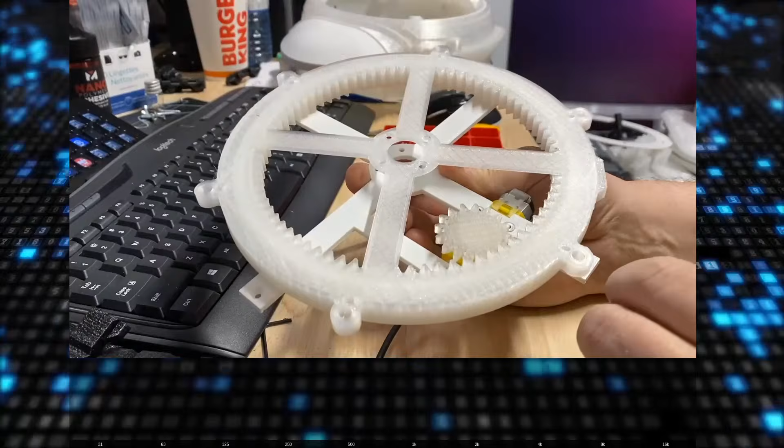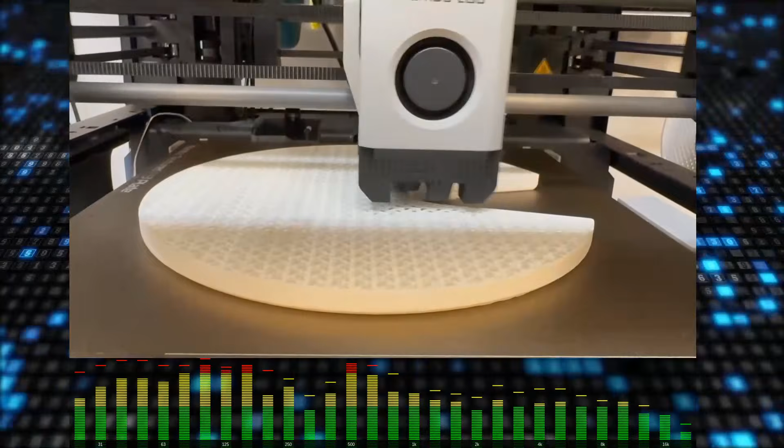Flip the switch, light the fire, ideas spinning higher, higher. Testing, melting, shapes take form. Welcome to the stream. Do it 3D and laser dream. Cut it, carve it, build the same. Welcome to the

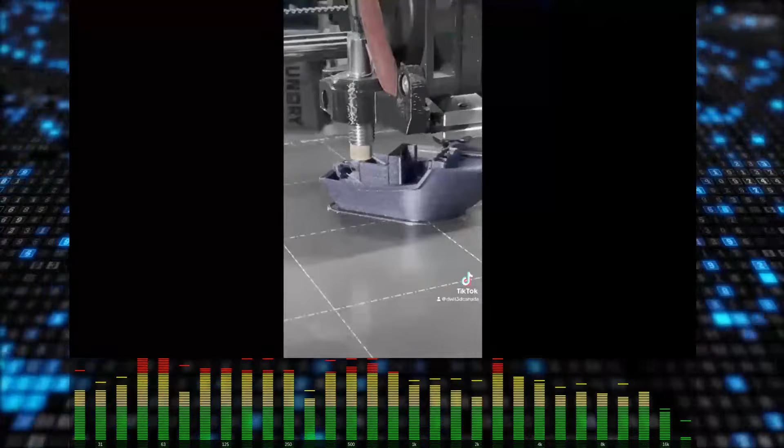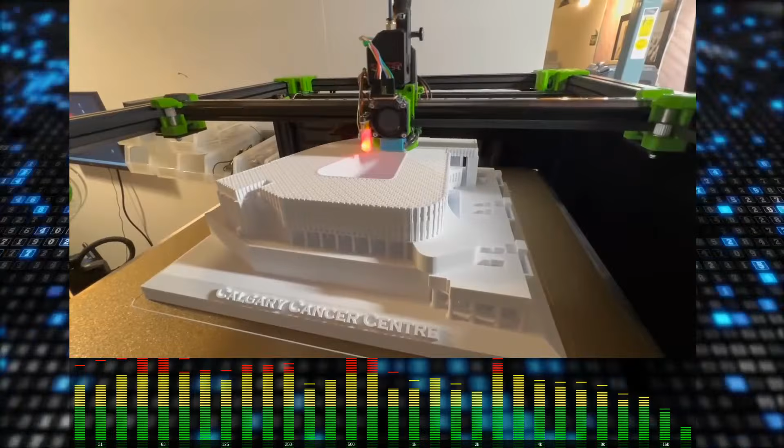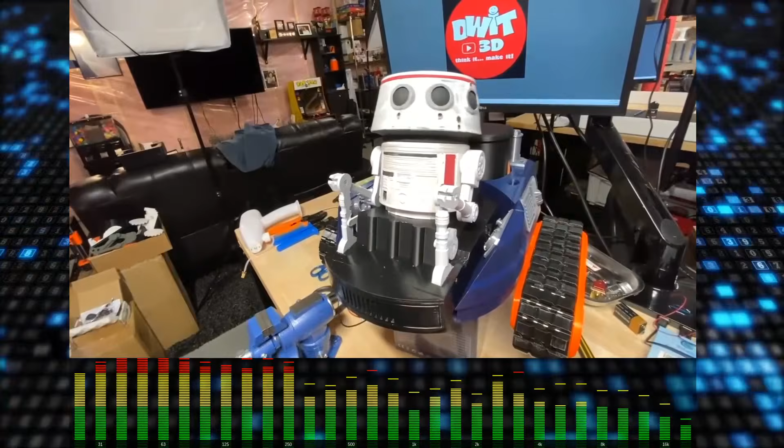Stream. Lines of code, sparks that fly, layers stacking, reaching sky. Mistakes happen, we don't cry. We learn, we teach, we play. Together every day. Welcome to the stream. Do it 3D and laser dream. Cut it, carve it, build the same. Welcome to the stream. What will we make today? What will the laser say? Engraving shadows bright, crafting through the night. Welcome to the stream. Do it 3D and laser dream. Cut it, carve it, build the same. Welcome to the

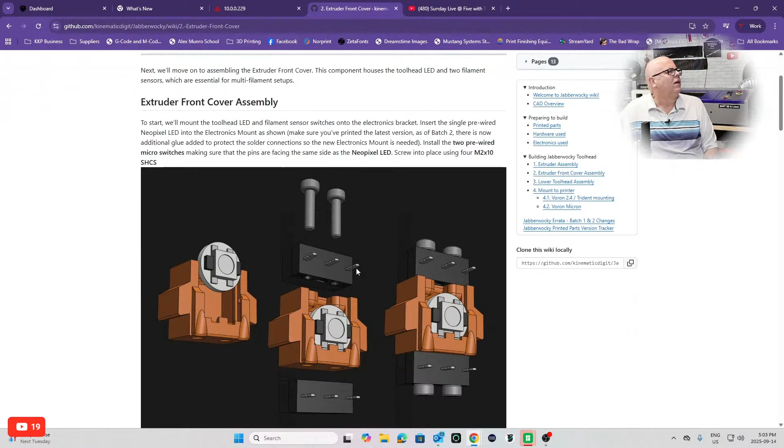So last time we were at this stage right here where we finished putting together the extruder front cover assembly. Okay, we got the LED in, we got the little switches, the sensor switches, I'm not even sure what those are going to control yet, but we're going to find out. And then next thing, we didn't have this, which is the clear insert. And then the next thing we're going to start working on is this shaft.

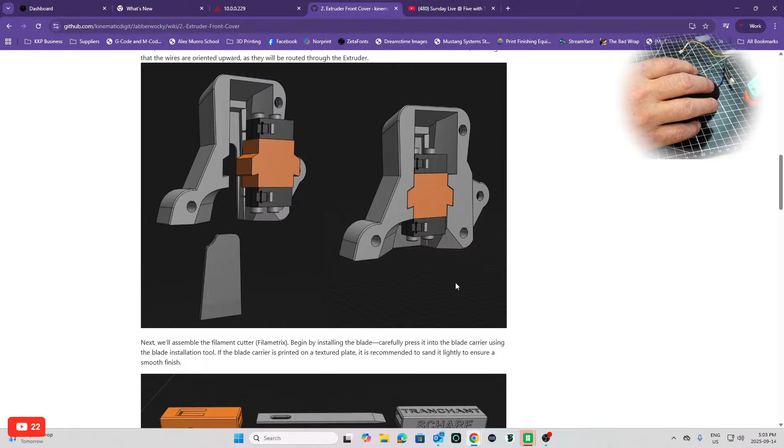That must be a foreign language for sharp. Sharf. Tranchant, I'm not even going to try and say that. But there is where we're at, right at that spot right there. Why did I do what I just did? I don't know why I did what I just did.

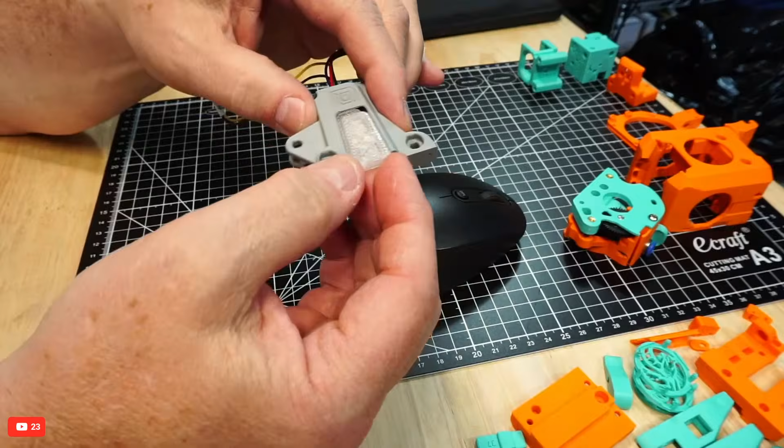So the piece I just printed, which we didn't have printed last week - we just finished assembling this piece here. We had the wires all coming out, had to put the LED inside here, and then there's this clear piece. There were 2 options to print on the clear piece: a logo and one called Monster. Because I'm afraid of monsters, I'm going with the one that says logo. This is transparent PCTG. I printed that, and it'll just slide right into that piece like that, and that's going to illuminate the LED that is under there.

That's a fancy LED - my brain escapes me right now on the actual name of that, but anyways that part goes in there like so. So we'll continue on now, and we need the ingredients for the blade holder.

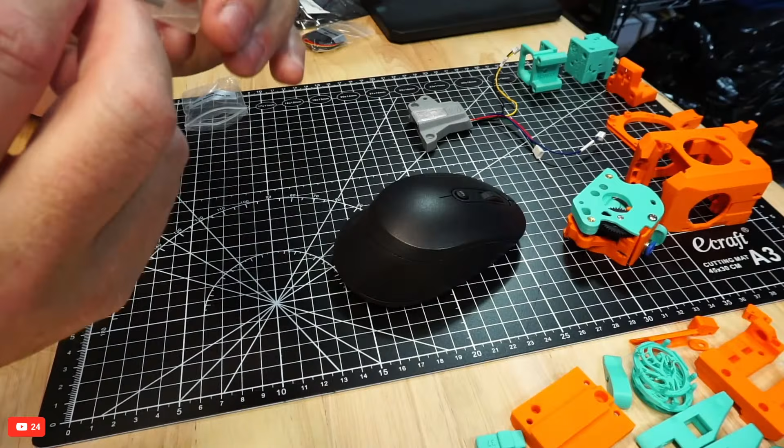That is our blade, which is going to be used to cut our filament, because this does have a cutter. Oh, this comes with a few blades actually - look at that, it looks like we got 4 or 5 blades in here, at least 3 to 4 to 5. 5 pieces, it says right there on the bag. So I was pretty close in guessing that, wasn't I?

We have our little blade holder thingamadoobers here. This is going to be part of the cutting system. Now, for some reason, I printed 2 of these. I think again there's 2 options to print, but these both have the V60 number on them. Sometimes I just print 2 because I like to have a spare.

I think this is all we're going to need. So let's go ahead and check the video.

You've got a frickin' cold, yeah. These are allergies. Hey, pup away. You were here but gone, but not to worry, you won't be for long. That almost rhymes, pop away. You should write a book. Oh, forgive the sniffing, it's just bad allergies today.

Okay, let's switch over to the display. So our next step, what they're saying, will assemble the filament cutter, Filametrix. Begin at the end by installing the blade - carefully press into the blade carrier using the blade installation tool. If the blade carrier is printed on a textured plate, It is recommended to sand it lightly to ensure a smooth finish.

So let's see, the blade carrier is this guy here. It was printed on a textured plate, but it has a very smooth finish - it wasn't very deep. Let me actually go ahead and put you back here. It was printed on a textured plate, but it's not a very rough finish at all - it's actually quite smooth, so we're not going to worry about that.

So let's pop a blade out of here.

Hey, Soldier Farms, how are you doing today?

Okay, we'll pop a blade out. There's 5 of them, we just need 1. There we go, we have 4 spares because, you know, we all know 5 minus 1 is 3... 4.

Here is the blade carrier, which is supposed to help prevent slicing my finger open, but if you know me... So I think the front of the blade goes in like so, with the blade portion up. It has a very tiny taper, so we want the taper up in here. Come on, get in there again - I just had you in there. There we go. And then the blade holder, we're holding in the down position like this, and we are sliding the blade in.

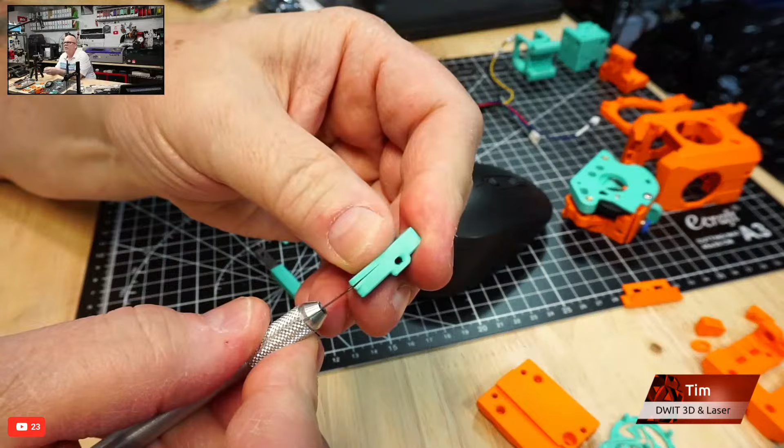I don't want to deform this piece. If I have to print another one, not a big deal. Yeah, see it's starting to split here. Let's see if this will go in. If I got to print another one, so be it. But let's just see if I can get this. Nah, see, we're gonna split that holder there. So we may end up just printing another. I may just, yeah, see that broke off.

So let's just go ahead and print another piece. Yeah, see, it's the overhang in there. I don't know if you can see that, but there's some overhang filament in there that was not quite overhanging properly, and we're going to have to reprint that piece. Not a big deal. Of course, that's the one piece I didn't print a spare of. I have 2 of everything, but not 2 of that.

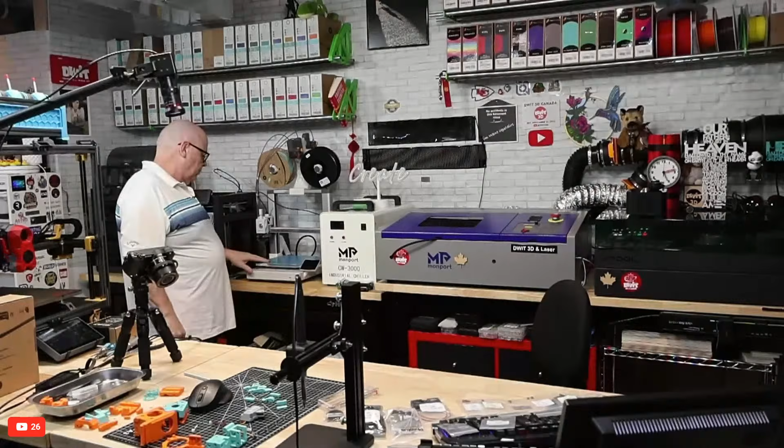And what I'll do, since they asked, is I will grab, where's my other beds here? Somewhere I have a whole bunch of beds for these printers, and I have a smooth bed. We'll just run it on this bed, it's relatively smooth. Okay, fair enough. I'm just going to reprint this part, then we'll build on the other stuff while this part's reprinting.

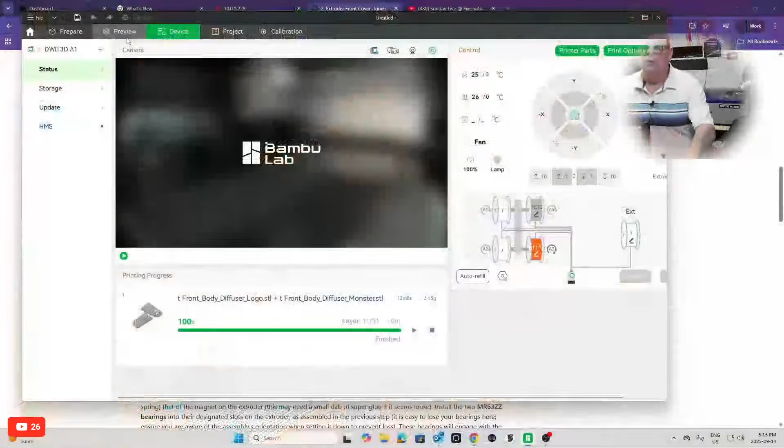Okay, so let's just quickly open the slicer here. Boom, boom, no build plate placed. Yeah, I know, I made a brain fart earlier, but there's a build plate there now, don't worry about that. So I can, just so you guys aren't bored with just me seeing here. Been cool in Nova Scotia, but warmed up today, we've had a very warm week. We had a crappy summer here for the most part.

Okay, so yeah, we'll just leave PLA. I don't care if it shows orange, that's fine. Let's just sync the PLA, let's go ahead and synchronize. And there's the orange, there's the lenses I just printed. So we'll delete that, we'll delete that.

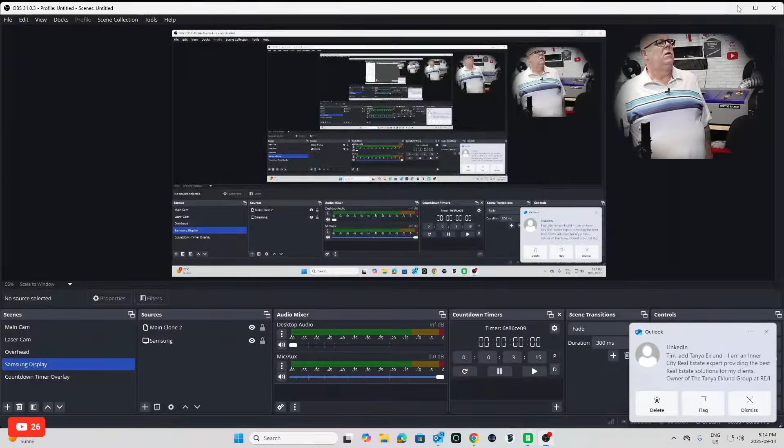I'm just going to grab my files here. Jabberwocky and STLs, and that was the extruder and the, no, we are looking at the blade mount. We are looking at the extruder. We're on mount probes, must be lower tool head. Conch mount, where's, okay, I just got to find that file. There we are, blade holder. LDO 37 blade holder, so that's what we want right here.

Whoa, we don't want all those, stop. There we go, just like that. And actually, just because I can, I'm going to clone it twice.

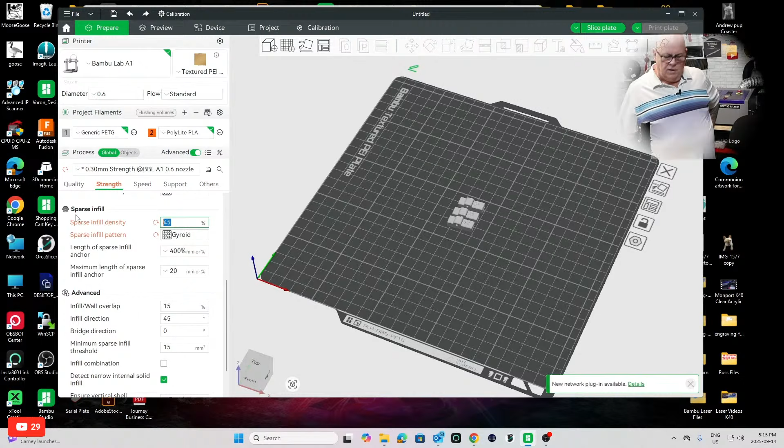We're going to print 3 of them, and I'll set strength to 4 perimeters, 5 walls, 45% infill, and gyroid. Heck, these are tiny pieces, let's just give it a solid print.

Let's slice the plate. Should be like 10 minutes, 15 minutes, big deal.

And we'll print the plate, and we will... wrong filament. Why did you select the wrong filament? Oh, because I have the wrong filament selected. And we want filament number 2. There we go. Now let's slice the plate and print it.

Okay. Soldier Farms, got to do chores, popping in to say hi. Well, I appreciate that, Soldier Farms, thank you so much. And Jack in the Shop, another Sunday. Yes, it is, it is another Sunday in the studio.

And there goes our beautiful music tune. Let's go back to this, so we can skip this part for now.

We're just going to wait for this to print. But in the meantime, I think, oh no, we have to have that part on to do this. Oh, that kind of sucks.

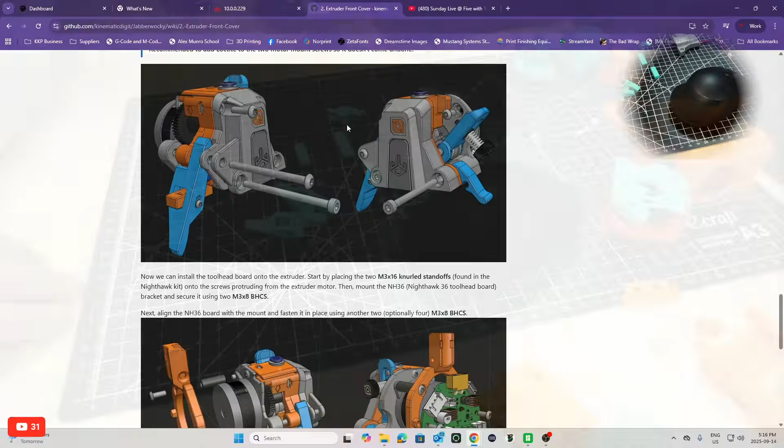Okay, well, we'll chat while we wait for this to print then. 15 minutes chat, why not? Oops, there we are, so we got to let that print.

Did you change the orientation to avoid bridging? No, because I think it's going to work. This is going to be on a different printer. And I guess I could orient it sideways, I suppose.

Let's just see, what could I have done with that? But I don't want to have to use supports. Let's just see. So if I... could I have... I suppose, oh, I'm not changing my display. I suppose I could print it.

I suppose I could print it that way. Let's see what that looks like sliced. Okay, that might work. Let's see.

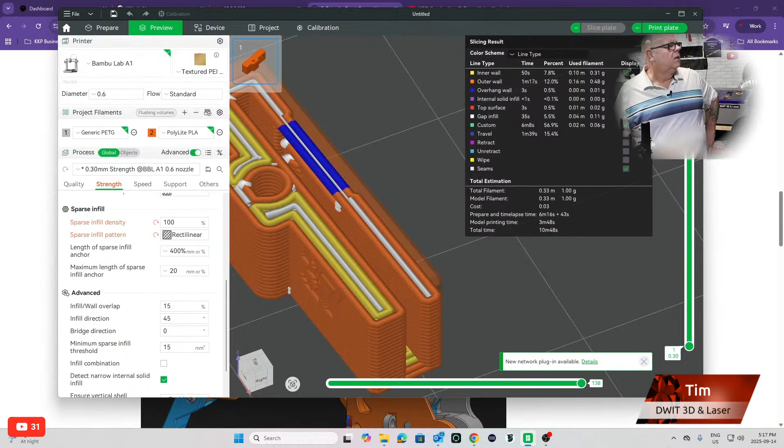Just have that one bridge right there. But we have an overhang right there that probably wouldn't work. I would need to put support material right in under here.

Let's just print these and see what happens. Let's see what these do. I can probably... start. Okay, we have that done.

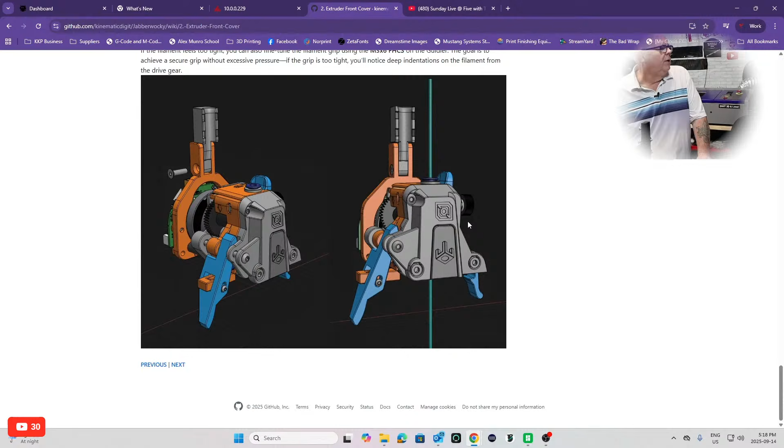We're going to wait till that's done. Yeah, so we need those, but let's go ahead and go next. I can probably start on the lower portion of this while we're waiting for this to print. So we'll do the lower tool head assembly here.

Here we go. So there's a few little steps that we can do in the lower before we have to attach the lower and the upper. So let's go ahead and start on the lower tool head assembly while we're waiting for this to print.

Either Tim or Steve have to stream on Sunday, or I can't internally calibrate your week. That's too funny, too funny, Brent.

Oh, excuse me. Okay, so let's go back, and we're going to grab the parts that we need. We're going to need the heat inset tool again, so let's get this plugged in, right here, and let's turn this on. And there we are, let that heat up.

And we're going to need a heat inset on this piece right here, this beautiful blue piece. This is to begin by installing heat insets into both the shroud body and the conch mount. Lay the shroud body face down, so we have a shroud body heat inset to put in, which is this guy here. And that heat inset is going where?

What? Oh, there's a piece of support material in here that I got to break out. So here.

Oh, okay, careful, let's move that over here. That gets a little bit hot. There's a piece of support material right in here that I got to break out, so let's just do that.

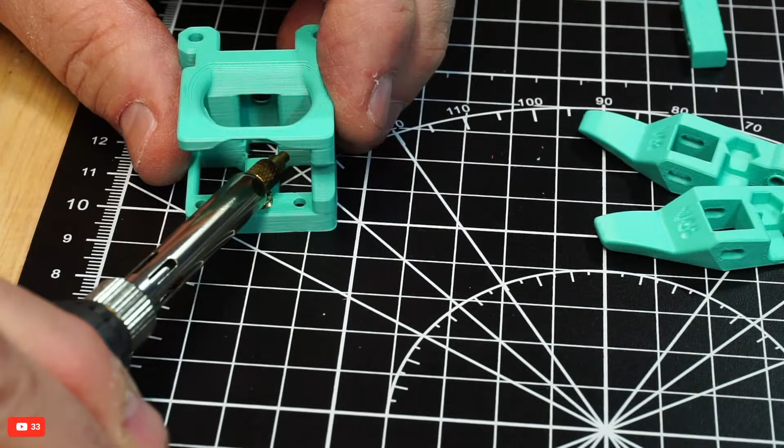So we're going to put the soldering iron in sideways, and we're going to attempt to evenly push that down. Ooh, that is not as easy as it looks. Okay, a little bit at a time. And I think, no, a little bit more. And a little bit more. I'm a little crooked. There we go, I think we got it. Well, where's my camera? There it is. I think we got it in there. Maybe not the prettiest, and then yeah, you see it's a little bit level there. I think we're okay, I think we're okay for that one.

That'll work. Now this one has got to go in this corner right here.

Oh, night Raj. Raj was saying good night and I said hi.

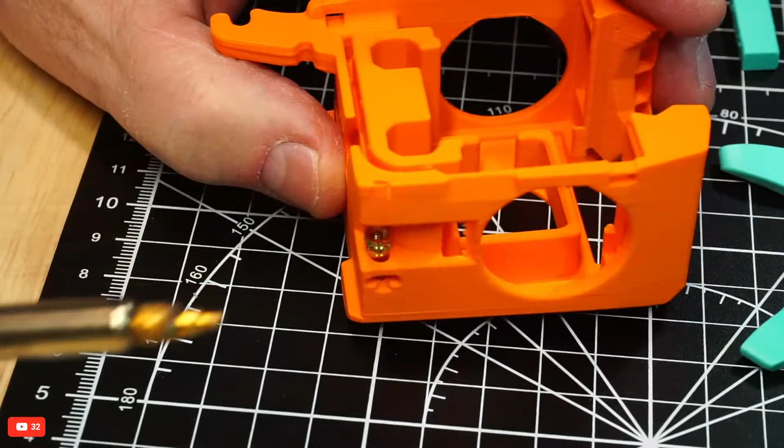Okay, so this one has got to go. Do you want to zoom in on this one too, to see me mess this up here? Here, we'll zoom in on this one. Okay, oh, this one's tighter even. Yeah, that's hot. There we go, the hole's not all that big in this. Is that right? Yeah, this is right. It's a smaller hole, this one.

There we go, I think that's about right. So let's just see. Ah, come on, get in the hole. This isn't settling in unless, is this a smaller, no, this is the same size. Same size heat inset for this one, but the hole just seems smaller than the other hole. Okay, get it started at least. Come on, it keeps moving, it's not sitting in that hole properly. Let's just make sure this is actually the right size heat inset I'm using. It doesn't say anything on here about different size heat insets. No, okay.

Get tweezers to hold it. Good idea, who said that? Guy the Jedi? Look at that. Thinking man right there. Okay.

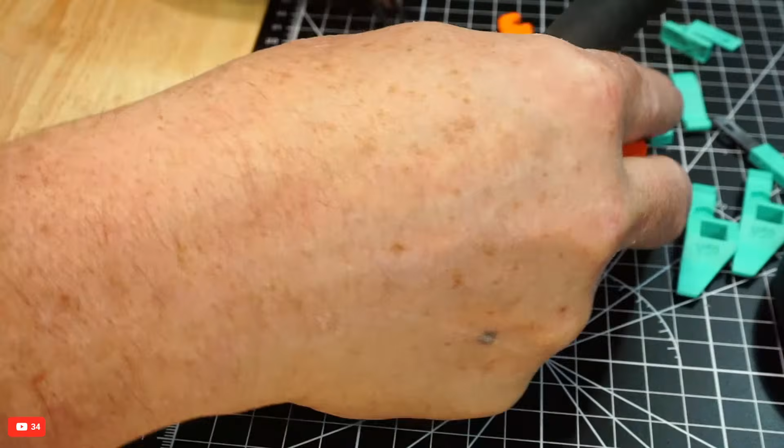Yeah, okay, I can pull it out. Jerry's saying stop - yeah, it's off center. So I'm going to try something. I'm going to grab a screw and try this.

I'm going to put the screw through this hole and screw it into the insert. Actually, I've got to clean it. See, well, it did kill the time because that piece is finished.

Is this a 3mm? It is. I'm going to just open that hole. There we go. I'm going to push this through and screw it into the insert a little bit. There we go. Now I am going to actually heat the insert and push it down through with this.

Jerry's right. What did Jerry say? Is that a slot for a square nut? Oh, it is. Well, why are they having me put a heat-set insert in there then? You know what, you're right. It is. I should have known that.

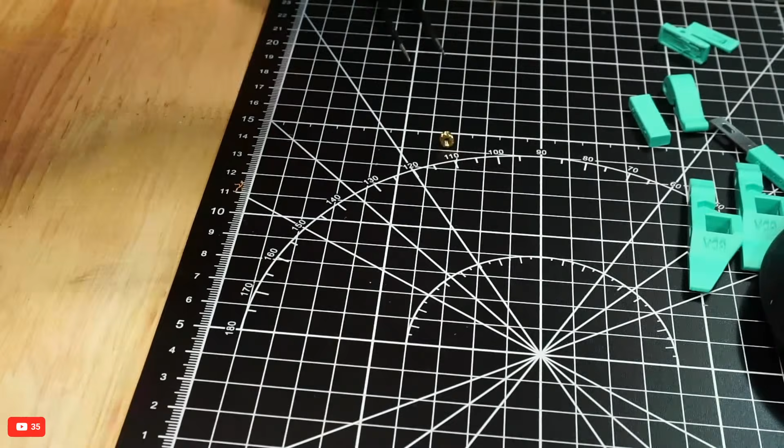Did I totally ruin it? Let's just see - no, I didn't ruin it. It'll still go into the... okay.

Okay, I missed the comments, Jerry. Thank you, I didn't wreck it that badly. I can still fit a... it'll still work. Here, look, that'll still go in, and I can still put a square nut in there. Well, they didn't... that's what I get for following freaking instructions.

Is the other one a slot for a square nut too? No, it's not, this one did need the heat-set insert. Okay, just turn that off. So obviously I'm not the only one who struggled with doing that, because they obviously changed it to make it a slot for a square nut. So there we go, okay, let's get this out of the way. See, I've got to start reading chat more.

Okay, there's not a square nut in it, but it can fit a square nut. So I have a square nut here, I have a square nut here. Yeah, and Jerry's 100% right.

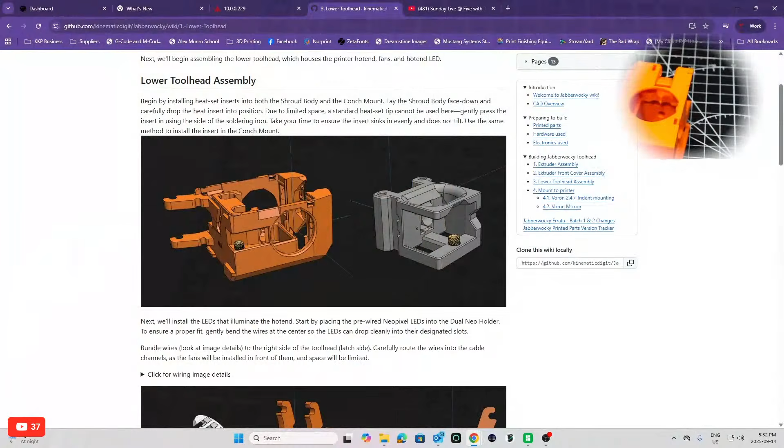They obviously changed that, because if you look at the instructions, if you look at the image there, which is right here, there's no hole there for a square nut. They've obviously added that because obviously there's been some difficulty doing that. So yeah, the square nut is going to go in the round hole - no, so the square nut hole is right here. Right there, whoops. I didn't deform it or kill it yet.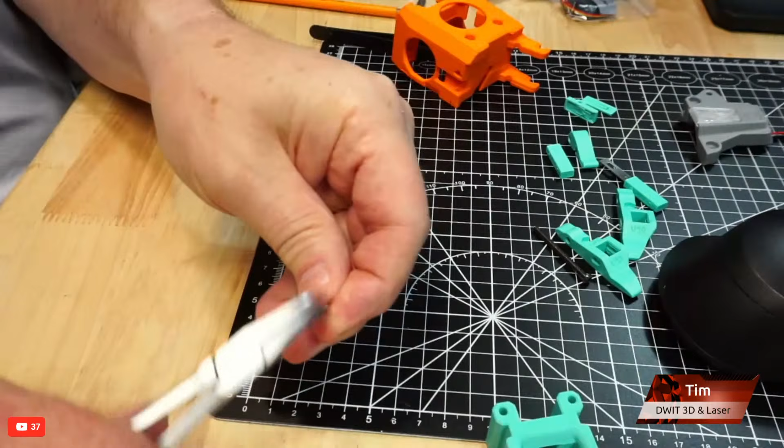It's just a snug fit. Okay, let's just grab this with my pliers. And that's not a square nut, that's the wrong nut - that is, no, that might be the right nut. Let's see if I have any other square nuts here before I use one of those.

That's one of the tiny T-nuts, but it's probably what it's going to be used for. I imagine that I would get a spare one, but let's see if I can stick one of these in here. That's going to go in this way, like that. And that's that, yeah.

And we'll just make sure that this is actually going to grip it, that I get it in right. And where's my... yep, that is right, that is working. Yep, we're good, thank you guys.

3D Sebastian commented first, okay. Well, either way, you guys all saved my skin here, so it's all good. We got that done.

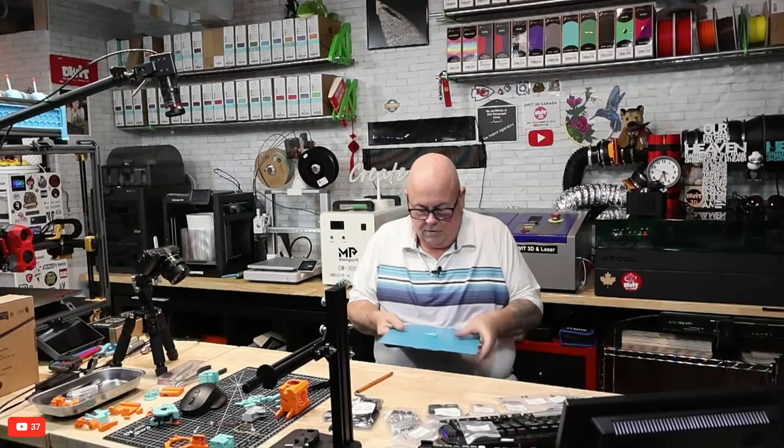Sometimes I almost screw up. Let's go ahead and pull this print off. We got three of these things printed now. There we go, let's see if that worked.

Throw that back over. And yeah, these look like they've got better clearance on them. So we have three tries for one dollar here.

Don't jabber up my walkie. Are you trying to be the new class clown?

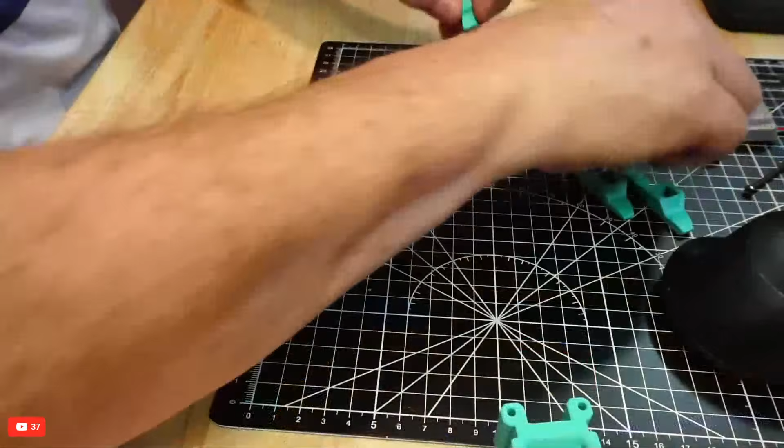Oh yeah, okay, here we go. Let's see if we can get this to go in this time. And this time it is still pretty tight. Let's just see, we have three tries for one dollar here, so what the heck. That's the bad one that I broke.

Yeah, those stupid overhangs that are happening in there. And this one looks like the cleanest, so let's see if this will go in. Let's see.

Can I force it? No, that does not want to go in. It's those - I may have to print them in that different orientation then, and hopefully that works in here.

We've got the blade in the right way there. Get the band-aids ready - no.

No, we're not going to cut ourselves. You know what we do here? We get the vise out and we use it on this. But that's probably almost guaranteed to crack the piece. I don't see any junk in this one - there's no junk. Oh, there's a little piece there, that's the overhang happening from printing in this orientation. Now I'm wondering if I should just reprint them and try printing them this way instead, see what happens.

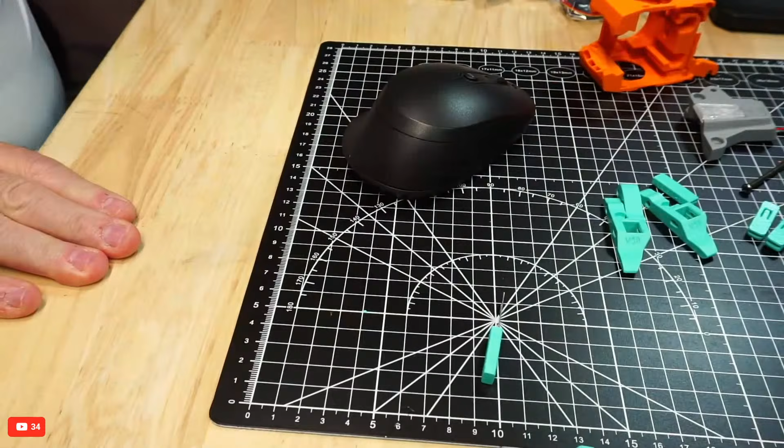Let's try that. It's a very fast print. Hello, Timor714. So let's get the build plate back in place. Okay, we're gonna go back to here, and let's pop this up. Let's just try them in this orientation just for shits and giggles and see what happens. We'll clone that - we'll just do one of them, so we have 2 pieces. There we go, let's slice it and print it.

There we go, see if that makes a difference. Okay so we got these in, we got the 2 heat inserts in. Now we're going to work on the lights, on the LEDs.

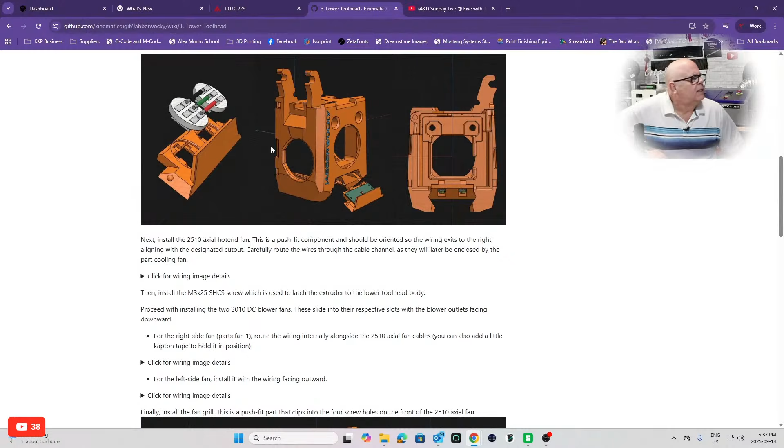What's the worst? I know, this whole stream is the worst. I get it, I get it. I really do, I really do. But I'm doing my best.

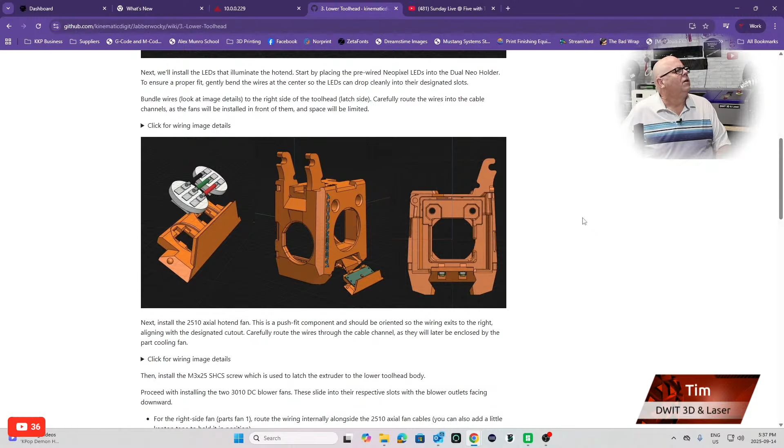Okay, now onto the LEDs to illuminate the hot end. Start by placing the pre-wired NeoPixel LEDs into the dual Neo holder to ensure proper fit. Gently bend the wires at the center so the LEDs can drop cleanly into the designated slots. Bundle the wires - look at the image details. Bundle the wires to the right side of the tool head, latch side. Carefully route the wires into the cable channels, as the fans will be installed in front of them and space will be limited. Okay, so they're going to route the wires.

Okay let's have a look and see what we're looking at here. So we are looking at this piece right here - let's get the mouse out of the way. This piece right here, and our LEDs are right here, like so. And they do fit in there nice. See, these are wired a little differently than the ones shown. They show 2 separate NeoPixels, whereas these ones we're actually working on are wired together, almost put together. It almost looks like I need to put a screw of some sort through that hole to hold them in.

What are you doing, what do you need? I'm gonna say hi to the viewers. Well then come and say hi, don't just stand over there. Waiting for you to recognize what I was gonna do. Well what were you going to do? I was trying to tell you. You're trying to scare me. No, I was trying to. Well say hi - hello everyone, hello Guy the Jedi. I cannot pronounce some of these names. I know, neither can I. You have Guy the Jedi, Kilroy's Odessa Woodworking, Big Bad Joe, Andrew Humphrey, Nick. Jerry's on stream, tell Jerry hello. Hello Jerry. There's also everybody - just say hi everybody, that way it'll cover everyone. Hello everyone, GTR Dad is here, Another CG is here, well hello. And the class clown's here - just say hi class clown. Hi class clown, there he is right there, Andrew Humphrey, he's the class clown. Oh hello Andrew Humphrey, make some good jokes this stream. Okay see you later, see you later.

Okay, so those are going to slide. So here we go. Why did I do that? This is the one I want. So these are going to go into here, and then this is going to slide up into there, like so.

And then on the inside, there's got to be something holding that into place here. Maybe, maybe not. And then the wire is going to route around which side? I'm going to assume on this side. This is the finicky part here that I have to put a little bit of thought into while the other parts are printing. I'm going to go back and recheck this.

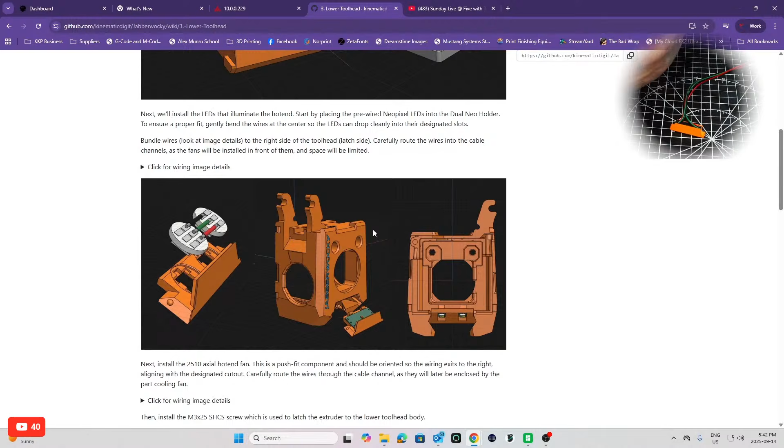Bundle the wires. Look at image details. You see, the image details don't give us much about wire bundling. Bundle the wires to the right side of the tool head, the latch side. So that is going to be the latch side, which is this side here. Carefully route the wires into the cable channels, as the fans will be installed in front of them and space will be limited. I think what they're saying is to route there, there's the latch side.

I'm guessing that's the latch side because we have some latches here. They want the wires bundled to the right side, and then they're going to come up out to the back, and then the other fan is going to sit in here.

You might be picking up the Bambu. Yeah, you might have been picking up the Bambu.

Okay, so these have got to go in here like so. The wires have got to be routed to the right side, and then this is going to go in like this, to this slot right here.

Like that. If I push that in, I'm committed. That does not want to go in smooth. There and there. Like so, like that. Okay, I guess they're going to stay in place. It looks wiggly wobbly, as you can see, right? But they're going to stay in place. They're not going to pull out.

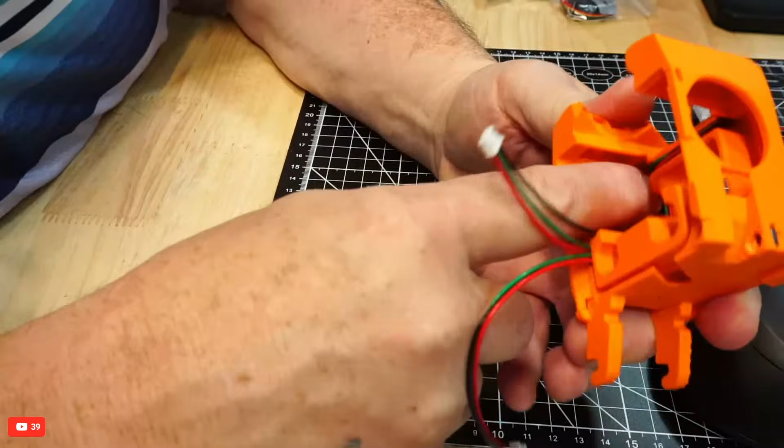So you can see the wires are kind of just in, and then there's going to be a fan sitting on top of all those wires. That's going to be tight. Is that ever going to be tight? Okay, well, let's just see. It might be, oh, I see.

And then they've got to route up through that gap there so the fan can actually fit in there. Oy, oy, oy. Why do I do this? Why do I torture myself with this stuff? Okay, so we're going to come back up there, through like that. Okay, let's start over.

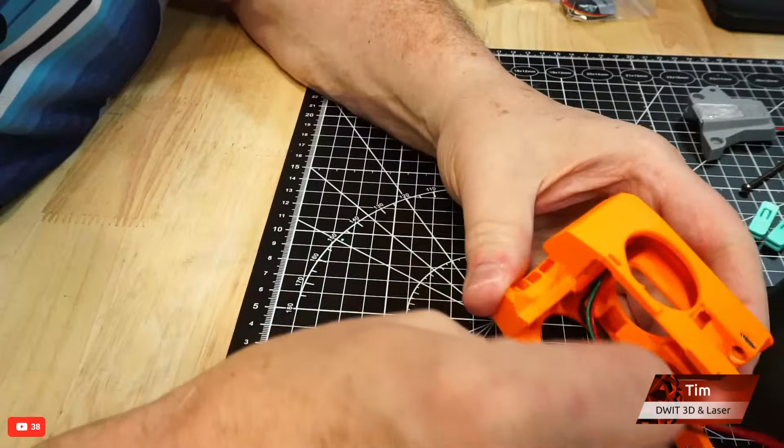That's how long it's going to take me to get these wires routed, I guarantee. Maybe not. We're going to try and get this to go. So we have that down like so. Get that green one out of there. There's a very narrow channel to run these wires through, very narrow.

And I can't complain, I don't design these parts, so I can't complain because obviously there's limited space in all this. So I'm just going to, I need to get that fan in there and see what I can do. Quite strong cables for an LED. Yeah, they're pretty thick. They're actually pretty thick cables. But okay, let's just see, because I believe now...

Install the 2510 axial hot end fan. This is a push fit component. Should be oriented so the wiring exits to the right. 2510 hot end fan, we're just going to work with this. So there's our 2510 axial hot end fan right here, and they're going to exit to the right as well.

Are you kidding? How many wires do we have going down that thing? At least these are much thinner wires. So this is going to be, so we always put the label of the fan facing where it's blowing. So this is going to sit in, down in, like so. It's a push fit, like so. And then the wires exit to the right with the rest of this bundle of wires, like so.

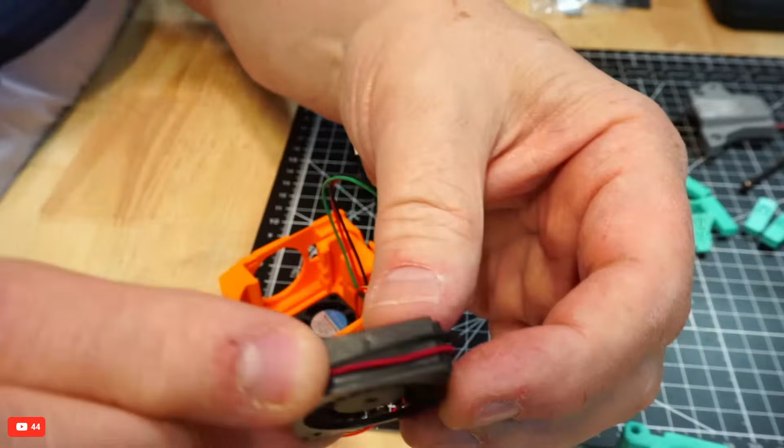Just popped in to say hello, can't stay, I'm out at dinner, but have a good one. Thank you, 3D Proto Lab, I appreciate that, Mike. Thank you so much.

Okay, so let's see if I can find something to use that would be equivalent to Kapton tape. Let's see what they are. I'm going to try it without the tape. I don't have any of that tape, and I don't want to use just standard because obviously.

So I'm going to route it. So the fan is going to push in. Why is that black wire out of place? These are very dainty wires, these little blower ones. So that's got to go in with the blowers facing down.

So we're going to get them in. This is going to go in like so. You get out of the way - you need 12 hands here. That's why they want you to use tape to hold these wires from trying to sneak out to the front or the side. Okay, there's the fan going in.

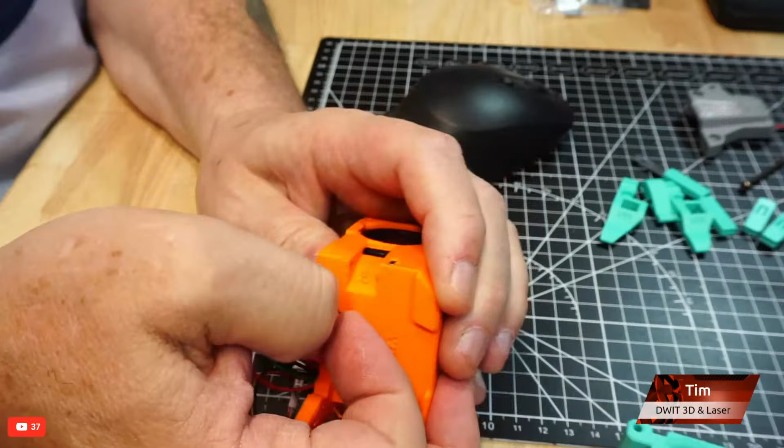Oh, that's where - oh, that's where that other thing goes. Okay, there's another in the image. That's where that other bearing goes. Where is that little bearing? It's this one. I just noticed that there's supposed to be a bearing right in here.

This little guy, before I put that in, this little guy right here. Got to get him in before - obviously I missed that, so there we go. He's supposed to be in there. That's the filament guide. Now I can route this wire, and it won't be in the way of that bearing.

Okay, where's my little tweezers? There's my tweezers. Just got to push these wires in underneath this. There we go, up along here. I got to get me some of that Kapton tape - make life a little easier, I think.

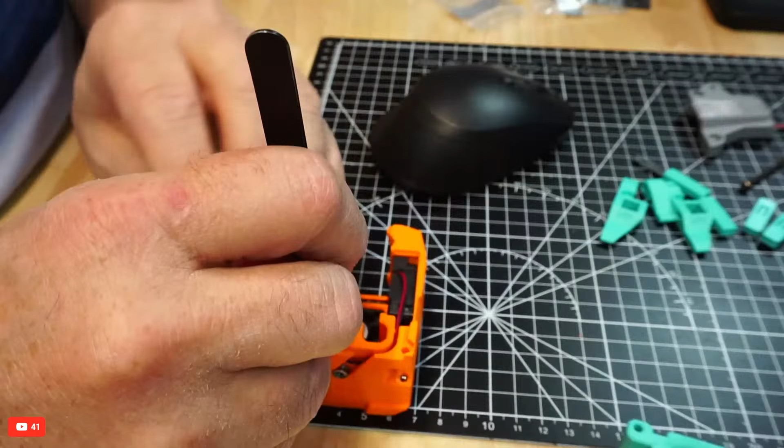Okay, there we go. Tuck those wires down - why don't you want to stay down? Come on. Big fingers don't help either. There we go. Okay. Man, this is... Here, what if I use this?

Okay, let's just leave it at that for now. So we've got that one routed up here like this.

Finally install the fan grill. This is a push-in fit part. Clips into the 4 screw holes on the front of the 2510 axial fan. Okay, so the fan grill, it's this guy here.

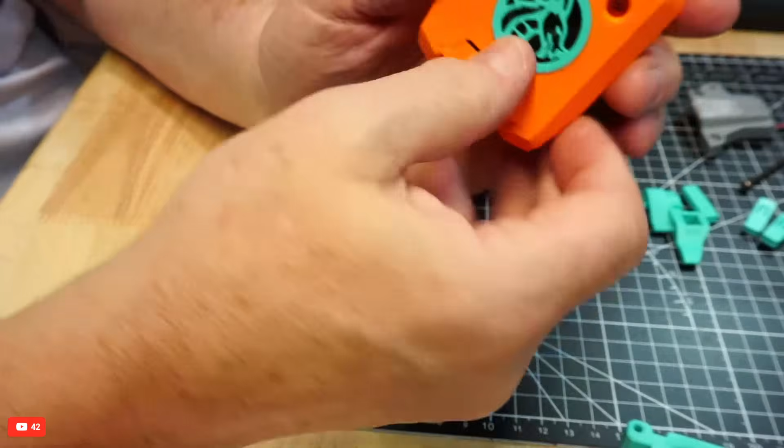That's going to be the dragon head up, and that's going to go... oh hang on, I see this one. There we go, this one's a little cleaner. This one's going to go, fits into the 4 holes of the thing. Oh, so it's going to go in at a little angle like that. There's the fan grill. That guy's got to stay in place.

That LED holder does not want to stay in there. It's all those wires in there. That does not want to go in too good. But I think once this is all put together, hopefully, yeah, see the wires are pushing that out. These wires in here are putting pressure on it. So see, that's just going to pop back open like that. Not happy with that. So many wires.

Okay, come on. Oh, that's what happened because I pushed the fan back out because this, and I just broke 2 of the legs on this thing. Okay, well, that's why I printed extras.

Let's push those broken pieces through. And there we go. Okay, 3 shots for $1 on this one. So here's another one. These are supposed to push through the 4 corners of the fan. There, there.

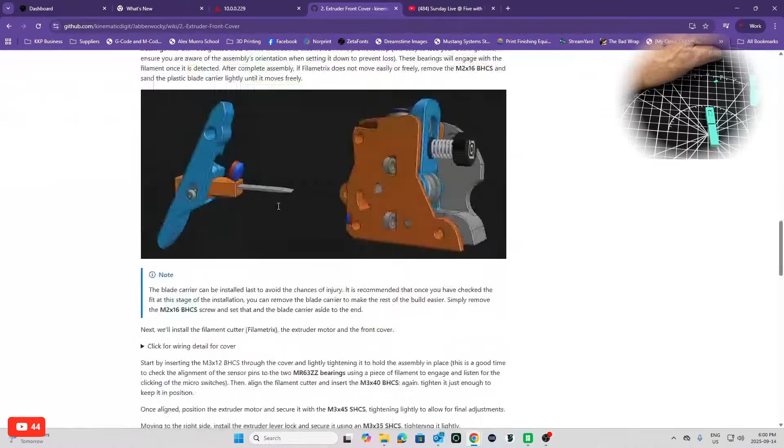Okay, let's go back to that so we can finish that one off properly. Let's just go previous, and we'll go back up to here. There we are. So now we got the blade in. Slide the blade carrier into the cutter arm and secure it using the M2x16 button head cap screw. This can also be done as the last step for safety. Then install the N52 magnets.

Okay, so let's find the blade holder. Let's find this piece here. Hang on, where am I looking? This is the... oh, I see the difference. Okay, so yeah, this is the difference between these 2 pieces here.

This is the one I want. It's got the little bubble head, which is going to use - that's where the screw that pushes the cutter activates the cutter. So this one I don't need. This is the one I want right here. No blood, no blood yet. Thank goodness.

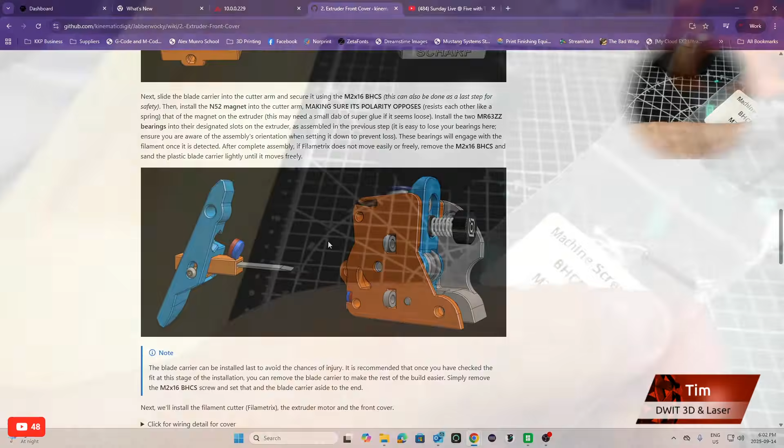So okay, so let's go back to this. So we're going to slide the blade carrier into the cutter arm and secure it using M2x16 button head. So let me find the M2x16 button head. I've got all my screws sorted here. So M2x16 button head, I should have all my screws sorted here. M2x16 button head right here. Right here, that's this tiny little guy. Right here, and we got a package of 1.

Come on, I hate opening these. Okay, there's the M2x16 button head. I'll leave this in the holder just for now because I know me.

This goes this way, like so. This goes through here. And the M2x16 button head is going to screw right through this side. Right here, what do I need? I need a tiny, tiny thing. Is this the one? That is the one. So this should go through here. Okay.

Hey, Petty Rexman. Did I say hi earlier? Probably not. Okay, this is going to screw right all the way in.

There we go, so far so good. Oops, I don't trust this cap being off, let's leave that on there. Ah hell, it fell off, okay let's just leave it. No blood, no blood, no blood. Okay, that is all the way through, you can see that screwed right through. That's pretty tight, I don't think it wants to be that tight, there's got to be a little bit of flexibility there. There we go, that's better right there, so we have a little bit of movement here. Okay, so we got that part in.

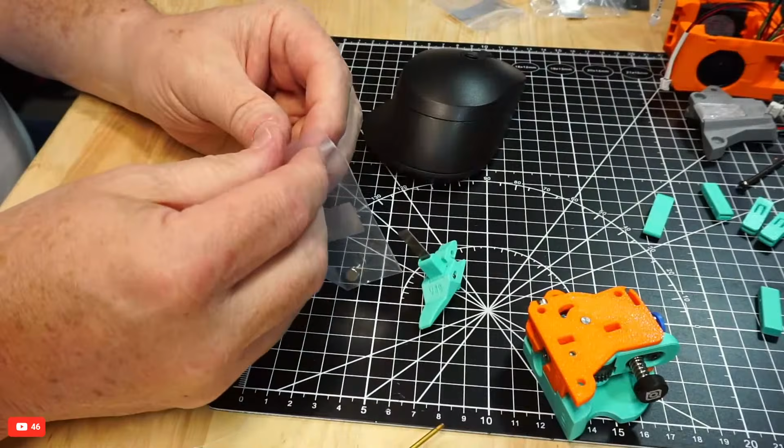Where are the N52 magnets? There's one here, but the other one should be on here. Okay, the other magnet is on the end here, so we want to make sure they oppose each other. Okay, so we want this one, come on, there we go. We want this one to oppose this one, so that one's attracting that one, so we want that one the opposite way.

I'm going to put a little dab of glue to ensure it holds the magnet in there. That blade showing, it's making me nervous, there won't be blood. Just a dab of glue in here, a little bit, that's all it needs, just a tiny dab of glue.

Okay, now we want the magnet to go on the opposite, we don't want it to go on this way, we want it to go on the opposite way. So the part that's adhering that, we want that to turn, and we want that to be the inside that gets glued in, just like so, so that those oppose each other. Okay, perfect, we'll let that glue dry a little bit, and then Bob will be our uncle. There we go, we got the magnet in. Dab of super glue if it seems loose.

Next, install the two MR63ZZ bearings into their designated slots on the extruder. MR63ZZ, where are you MR63ZZ bearings? Right there, 2 bearings.

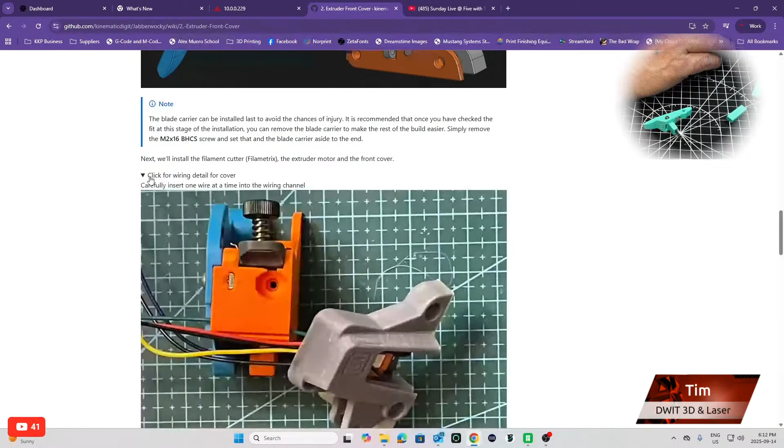Oh, yeah. What? Oh, the wires have got to go right through underneath on that. Okay.

Install the filament cutter, the extruder motor, and the front cover. Carefully insert one wire at a time into the wiring channel. Okay.

So we have the wiring. See, I just dropped the bearing again, so that's why we got to be careful of these bearings. Okay, so this guy is going to go on here like so.

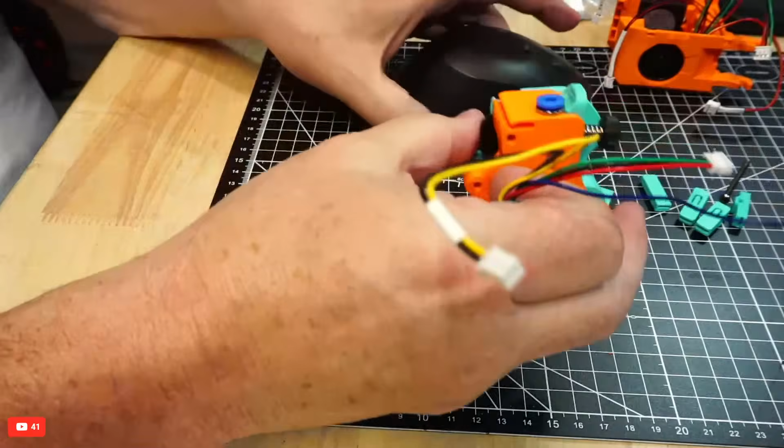These wires, oh man, these are the fiddly little parts. See the bearings keep falling. Let's take these bearings out just till I get these wires run, and then one wire at a time - we're running these wires through this little channel right here, because this goes on the front like so, and then we need to route these wires.

So let's go ahead and do that one at a time here. Hopefully I can do that without covering too much up. There's one wire, there's two wires, there's the blue wire like so, and then there's this LED wire. One at a time, it said, Tim, one at a time, like that.

Okay. Like that. Come on. There we go, like that.

Okay, but I have to get those bearings in there. Let's get those two bearings put back in here. There's the one. There's the second one. Okay, we get that back on there like so.

And then it says to use - this cover came out, I'm not worried about that. Okay, so we got that part done. That's not what I wanted, stop, okay. So we have that together like that.

Start by inserting the M3x12 button head cap screw through the cover and lightly tighten to hold the assembly in place. Okay, that's the M3x12 button head cap screw through the cover.

M3x12, let's find that. Okay, M3x12 button head cap screw. Flathead cap screw - where's my button head cap screw? M3x12 button head cap screw right here.

Okay, now I'm going to see if I can keep that assembly together. No, that's not going to stay together for me. So we're going to play ambidextrous here. Not ambidextrous, but we're going to be a contortionist. We're going to hold that open with that while I open this bag.

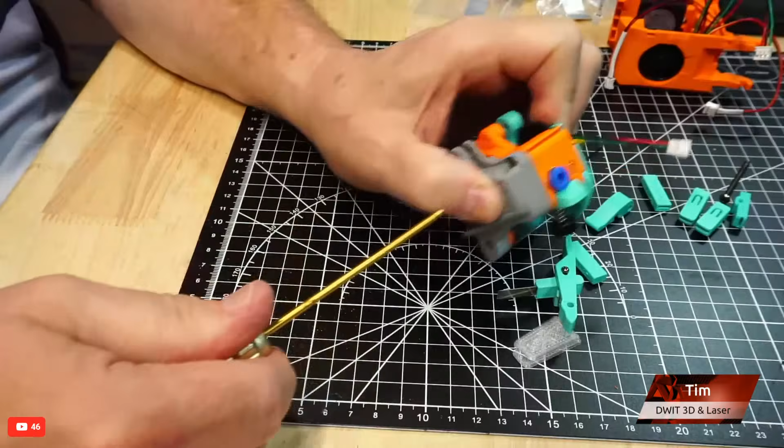Is it? Is it really? That's not going to fit. Oh, it is, yeah, it is going to fit. Look at that, okay good. So that is going to fit. Lightly - there we go, it holds the whole assembly in place. Okay.

Now it says, this is a good time to check the alignment of the sensor pins to the two MR63ZZ bearings using a piece of filament to engage and listen for clicking of the micro switches. Then align the filament cutter and insert the M3x40. So, okay, so those sensor switches that were at the back of this are filament sensor switches. So it knows when the filament goes in and hits the top one and then hits the bottom one.

So let's grab a piece of filament. You have to rely on Andrew Humphrey for shenanigans.

Yes, I gave Nightbot a talking to. So yeah, Nightbot won't be bothering you for a bit here. Let's grab a piece of filament here.

Any filament will do. Grab a piece of this red ABS.

Okay, now we have to insert the filament and listen for the clicking of the micro switches. Okay. I hear the first one, and I hear the second one. Yeah, you have to just take my word for it that I can hear them.

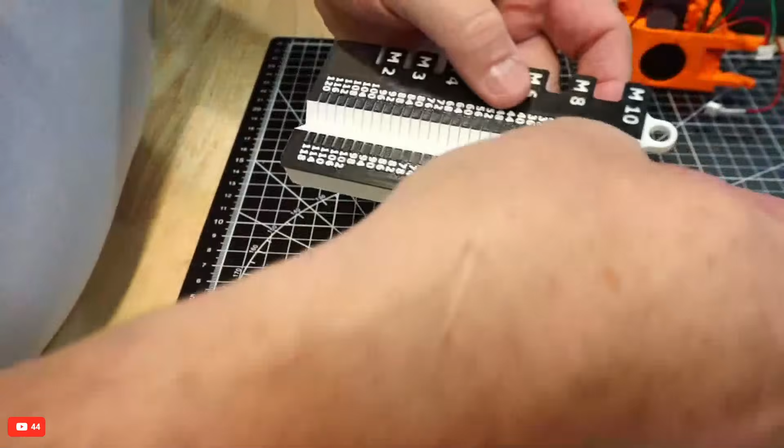Then align the filament cutter and insert the M3x40. Okay, where's my M3x40? Where did I put it? Right here, I think that's this one right here. Let's just make sure that that's a 40 millimeter. Yeah, that's the M3x40 for sure right there. Okay.

Okay, install the filament cutter. So where does the filament cutter go? Okay, so here's what we're looking at right here. I know my arm's in the way, but there we are. And then we're going to install the M3x40 right through the filament cutter. We're going to be doing two. So let's see, okay.

Once aligned, position the... okay. Then align the filament cutter, insert the M3x40 button, and after that tighten it just enough to keep it in position. Okay, so the M3x40, we're going to do that, which I believe is the top one. So this guy, so the filament cutter right here.

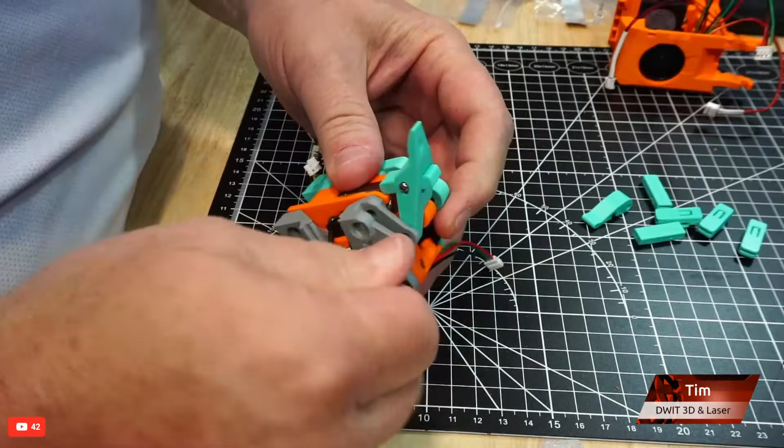That's going to come in like so. And the M3x40, because we have the magnet resisting it here, but this is going to go through here, through this guy, all the way through the whole thing. Okay, let's put this right through. Yeah, my electric one's there, but this way I can get a little more control.

Okay, that's not hitting something here. Something's not hitting. Just got to make sure that these holes are cleaned up so this thing can go through cleanly and smoothly. So I'm just going to take my little bit here and just make sure, there we go. Everything's smooth. Okay, so we take this, this goes through here.

It's a little tricky with that magnet wanting to push it away from everything, like so. But that's the whole purpose of that magnet, right? So, okay, I'm trying not to cut myself here. That's why they say you don't have to put that thing in right now if it makes it easier to install without it. But hey, here we go.

There we go, and right through. There we go. Now that's going to go in, and that's going to secure to that heat insert we put on the other side. There we go, now we're in. And we'll just lightly tighten it, not tight.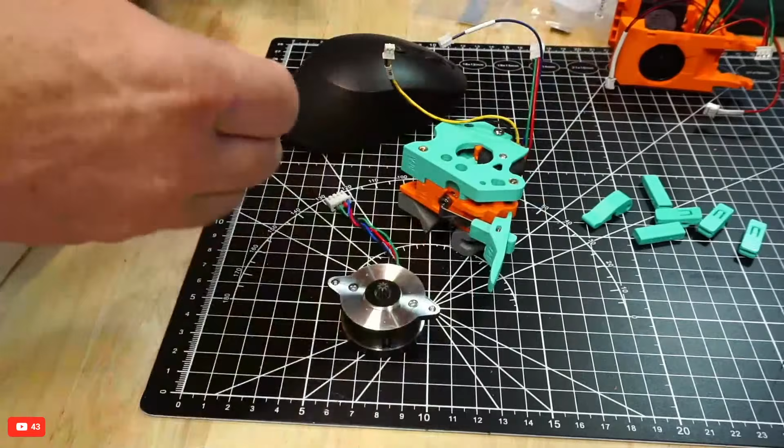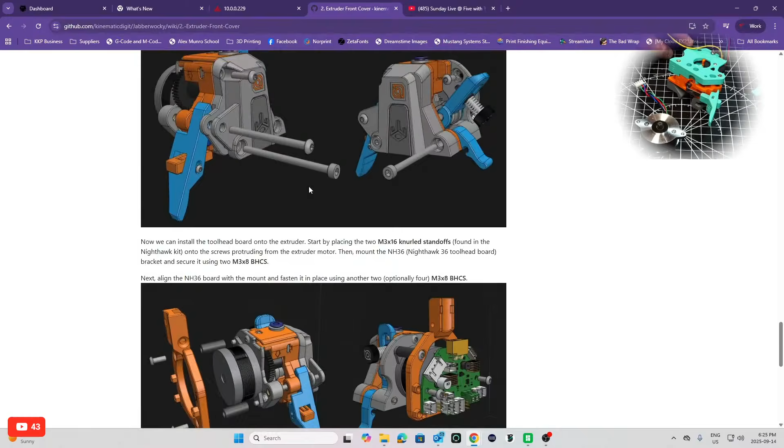What am I missing? Hang on a sec here. Okay, I'm missing something here. Hold on, let's have a look. So that's the one they tell me to secure the motor with, is this one right here, the M3x45 socket head cap screw, to allow for final adjustment. Okay, so this is going to go in here.

Why does it not want to? It's not reaching the hole. So if you look at this, it can't reach that hole. Hang on one second, that just about jabbed me. I'm going to stick that on there. So this is the motor. The holes are not lining up on either side.

Okay, what am I missing here? Obviously I'm missing something. This is the hole they want me to secure the motor to right here. Rotate 45 degrees. Oh, okay, I get it. My bad, that was pretty stupid. This is the hole they want me to put through for the motor. Oh, I see. I'm disoriented here. Of course, we don't have heat-set inserts for the motor because the motor is threaded itself. That's what was confusing me.

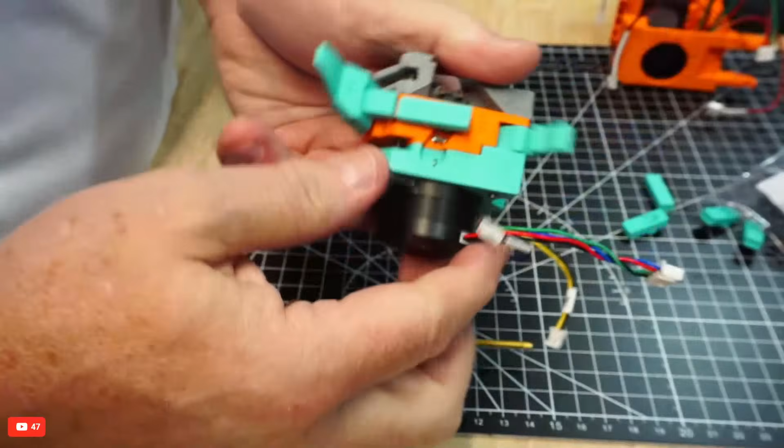Let's double check this. Maybe a little tight. Let's loosen that off, back that off just a little bit here. That feels a bit better. Okay, that feels better. There's no binding or anything happening in the extruder there.

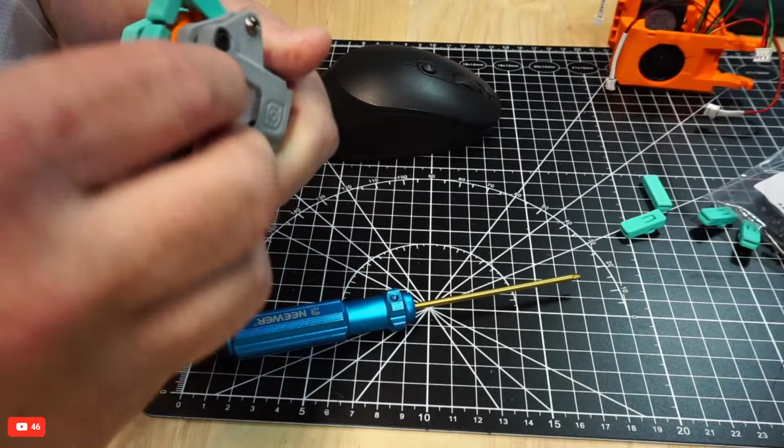Let's put that on, where's my clear cap on here? This guy goes in here. Did that get pushed out? Oh, I see the wires got pushed up here a bit, so move that wire out of the way. Oh, something's in the way here. Everything fits in here very tight. That's what she said. There we go, there's the cover. Okay, so far, so good.

Let's just take a pause here. Let's cut to this.

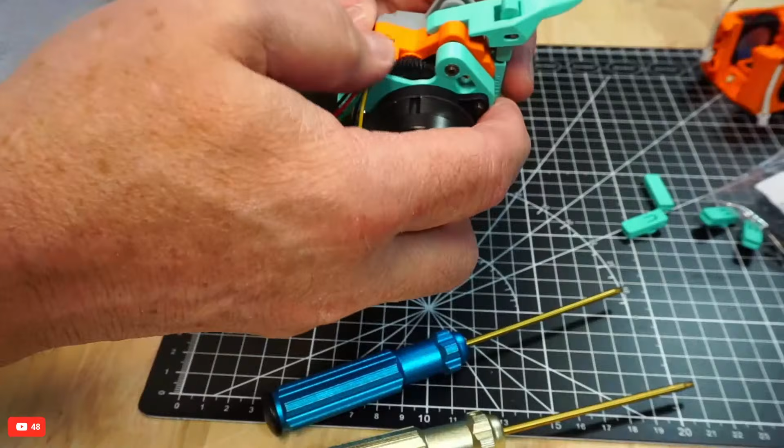Okay, once satisfied with the alignment, if you can turn it easily... if you can't turn it easily, readjust the screw until the wheel moves smoothly. Yeah, it was moving pretty smoothly, I could probably loosen it up a little bit more. I'm going to loosen it up a hair more, just because. That's the nice thing, there's lots of adjustability to this thing. Just going to move it a hair more out. There we go. There, where are we? Come on, there we go. Yeah, that's moving good. That's moving good, okay.

Peppers, onions, mushrooms. Whoa.

We're going to go back to this screen. Is there an email yet? Not yet, Nick's got to email me.

Okay, once satisfied with the alignment, ensuring gears are engaged without applying excessive pressure, fully tighten the 2 screws securing the extruder motor in place, which I can do. That's that one, which I already did fully tighten, but then the other one is this one that goes right through like the whole kit and caboodle.

This one right there. And I just exposed my blade again. There we go. Okay, now with that done...

It's recommended to add Loctite to the two motor mount screws so they don't come undone. We can do that later. Add Loctite, really? I guess I could put a dab of Loctite in there. But it's better to be on the screws. Why didn't you tell me that before I tightened them? But actually, if I do a dab on it now, it'll prevent it from unthreading itself. So let's just do that. Possibly, I don't know, whatever.

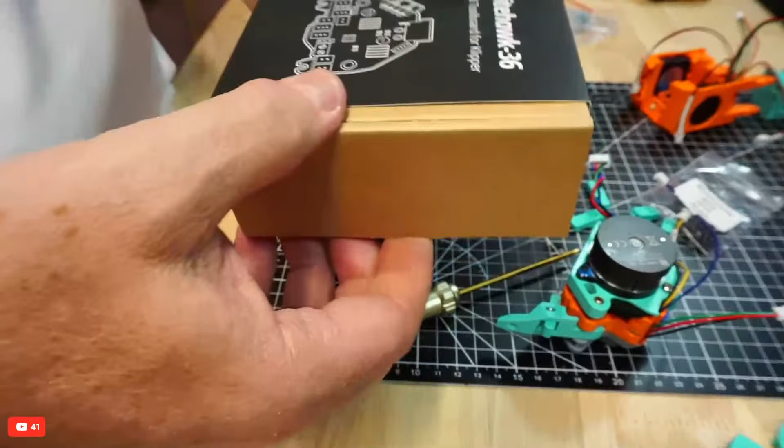Okay, so that Nighthawk kit is right here. Here's the Nighthawk 36 kit. Am I zoomed all the way out here? No, I'm not. There we are. Let's go ahead and pull this open. So there should be some knurled screws in here. Whoa.

And we're looking for the two black knurled screws. Knurled. There they are right there. So those are the knurled standoff screws right there.

Okay, those will get the Loctite on them too, because that's where the Loctite is. Start by screwing those into where the extruder motor came out, so that's going to go into right there. Right there, and on the other side. Come on.

These will be Loctited on as well, but these will also hold it from coming loose, so yeah, whatever. There we go. So there's those two on there. I swear I'm going to cut myself with that blade yet. Okay, there's that.

Then mount the NH36 tool head board bracket and secure it using two M3 by 8 button head cap screws, which are these ones. We'll need two of these. One, two. Let's get the tool head board out of here. That's this guy right here, the tool head PCB.

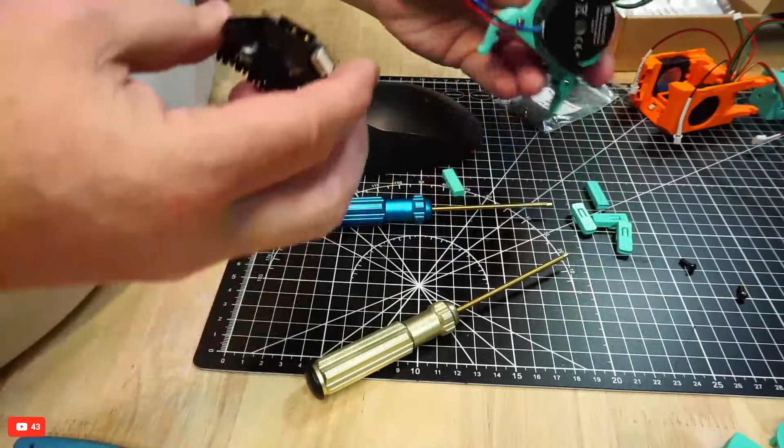Come on, come on. Like so. Okay, and we're going to secure it this way. Which way's up? Do I have...

Okay, this goes on to here first. Okay, this goes on to here. And then this is going to go on to those, like so. Okay, let's get this right. Let's read carefully here. Okay, oh, we're securing that one on first.

Oh, mount the bracket using, yeah, okay. Mount the bracket first, duh. Okay, so let's get these. Here's our M3 by 8s. Boom, boom, boom. That one's going here. Into the knurly dude. Knurly. Okay, and then the second one.

Oops, helps if I turn the camera. This one's going into that knurled one, like so. That's the bracket on the back like that.

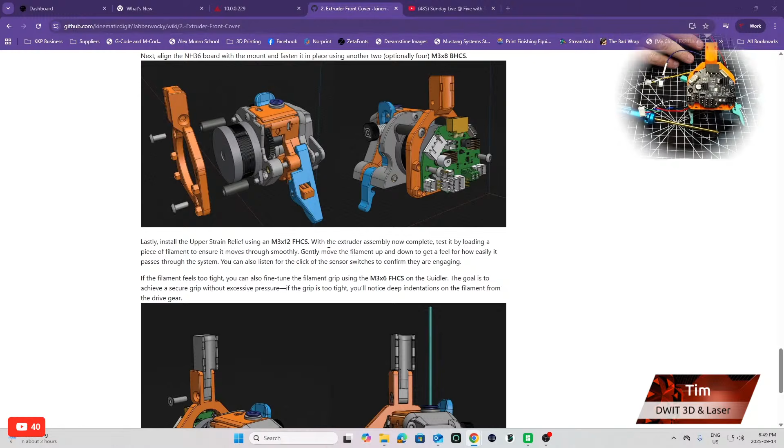Lastly, install the upper strain relief using the M3x12 flathead cap screw. With the extruder assembly now complete, test it by loading a piece of filament and ensure it moves smoothly, gently up and down to get a feel for how easy it passes through the system. You can also listen for the click of the sensor switches to confirm they are engaging.

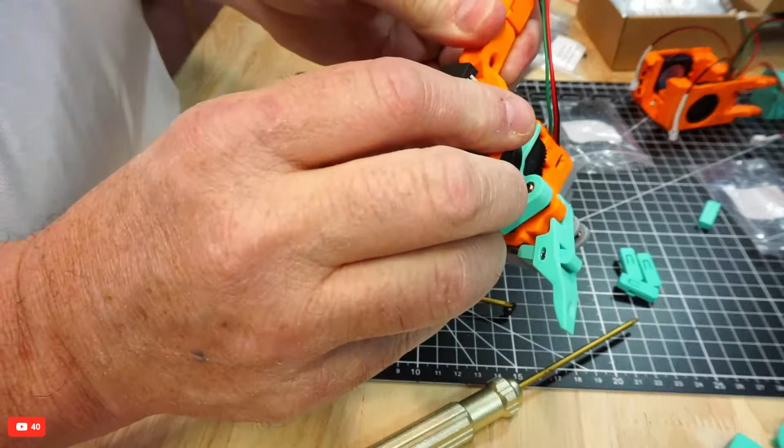Okay, so we're going to do the strain relief with an M3x12 flathead right here. M3x12 flathead. And the strain relief piece is right here. So this is going to sit in here like so. Curve towards the front, yeah right. Oh, there's a little support material in there. There we go, let's get rid of that. So this is going to go in.

Is that the right way? Hang on. There, right there. Why is that not sitting in there as flat as it looks like it should? I guess that is the right way. I guess that's right. Okay, again, self-tapping. Here we go.

There's the strain relief piece right there. That's what it looks like from the back side. See, it almost looks like that should sit up in there better, doesn't it? But it don't, I'll have to look at that. I almost, my OCD tells me that that should be sitting in straighter than it is. Looks like it's on a slight angle. But it could just be I need to clean up a bit of stuff on the back of it. That's possible. But yeah, no, I mean, that's, I don't know. Anyways.

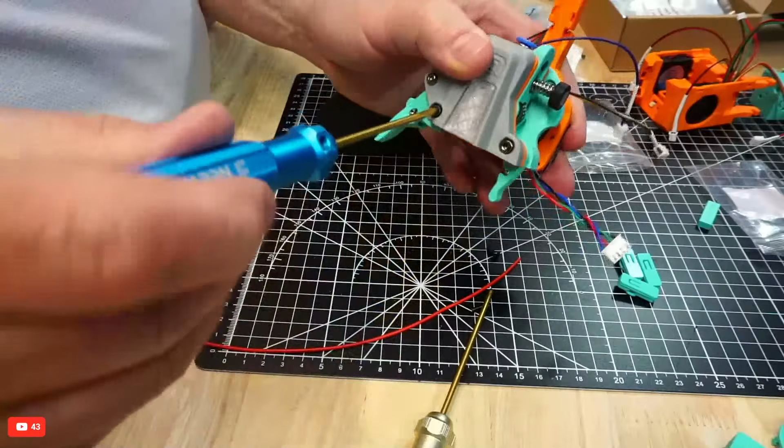Let me go ahead and loosen off that motor one just a hair. I'm just going to loosen that motor a bit while I'm here. So undo that one a hair, undo this one a hair. I think there's plenty of room for play there. Okay, let me just... oh, that's as backed off as it can go, right there. Okay, so that's as loose as I can get that motor against those gears.

And oh, look at that. You guys called it. I knew that was going to happen. I knew that was going to happen. I knew it. Hang on a second here. I'm not surprised that happened.

I got a quick Band-Aid. How did I know that was going to happen eventually? Okay. There will be blood. No worries at all, you guys. There is no blame to be had. It's my own stupidity. I know the blade's there.

So that's the extruder end built right there. Now we have the cutter. This is obviously going to clip onto the top end with a screw here. Something like this is going to come up to this part, and that's going to clip into here somewhere. These little indentations are for it to ride on. This is going to clip in somehow - you get the idea of what this is going to end up looking like. But we've got a hot end to put in and everything else next time as well.

Oh my goodness, half the power in the house went out. Phone hotspot to the rescue.

Don't forget to fill out the health and safety report. Yeah, right, really, I need one of those, don't I?

Well, we made some good progress again. Started off a bit slow, made a couple dumb mistakes on my end, but hey, what the heck, we got a fair bit done. It's time to go. Again, I've had people comment and say it takes me a long time to build this thing. Well, I'm only doing it live - I could have this all built and put together by next week if I wanted to, but I'm doing it live.

So this is concerning though. The concerning thing is that this bearing for the filament path keeps shifting, and I can see that being an issue since it's not actually locked into place here. What I mean is this little bearing for the filament path - if I shake this just a little, it actually falls out of place a bit.